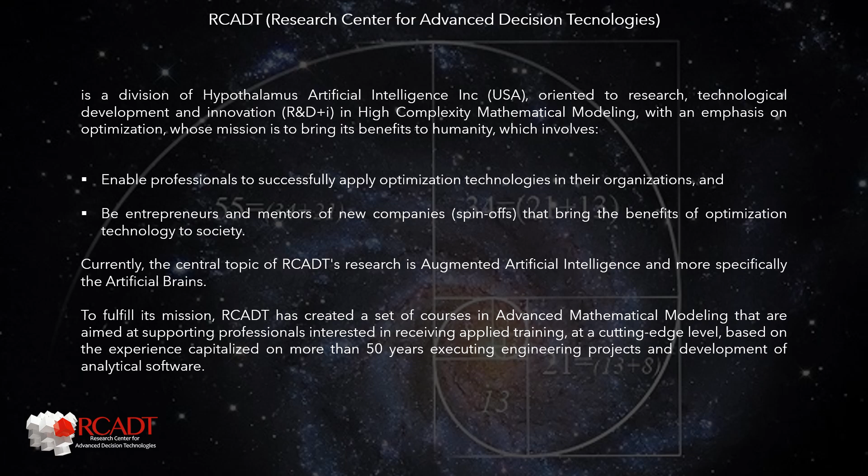To fulfill its mission, RCADT has created a set of courses in advanced mathematical modeling that are aimed at supporting professionals interested in receiving applied training at a cutting-edge level, based on experience capitalized on more than 50 years executing engineering projects and developing analytical software.

Parallel thinking: like paper-based math, sequential math for single-processor computers is dead. As in the human brain, in the future only parallel mathematical thinking will be practical. The new analytics are autonomous, parallel, and distributed.

Objective and structure: the material covered in the course spans two broad areas of applied mathematical programming: oil and gas systems and markets modeling, and implementation of owned enterprise-wide optimization systems.

Both topics are addressed from HAI's vision of multi-problem mathematical models, in which the development of computer solutions is oriented from the programming of algebraic formulas to the structuring of models, integrating the problems that make it up, as a Lego game. The student will learn about the main technologies for the implementation of mathematical programming algorithms and will learn to see them from this point of view, typical of Industry 4.0.

But it is not a specialized course in algorithm implementation.

Structure: the course is based on specialized academic activities aimed at training the participant in the main mathematical problems that must be solved in the strategic and tactical planning, operations scheduling, and process control of oil and gas systems and markets. The basic unit of the course is the virtual session, with an average duration of 90 minutes each.

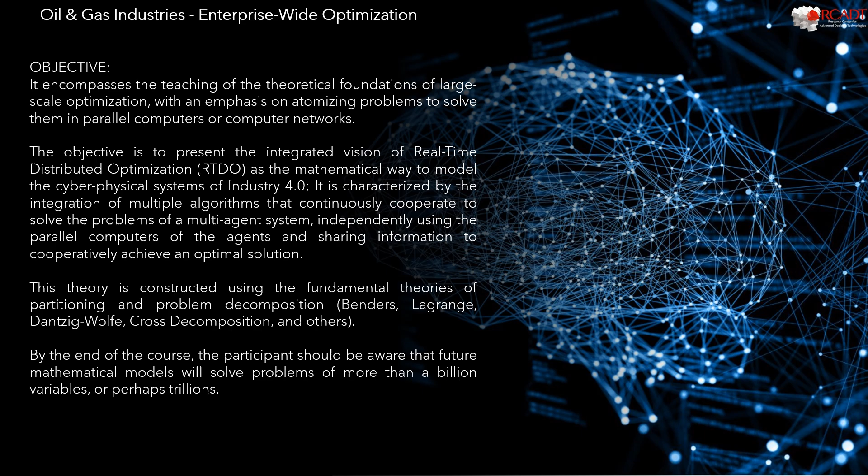By the end of the course, the participant should be aware that future mathematical models will solve problems of more than a billion variables, or perhaps trillions.

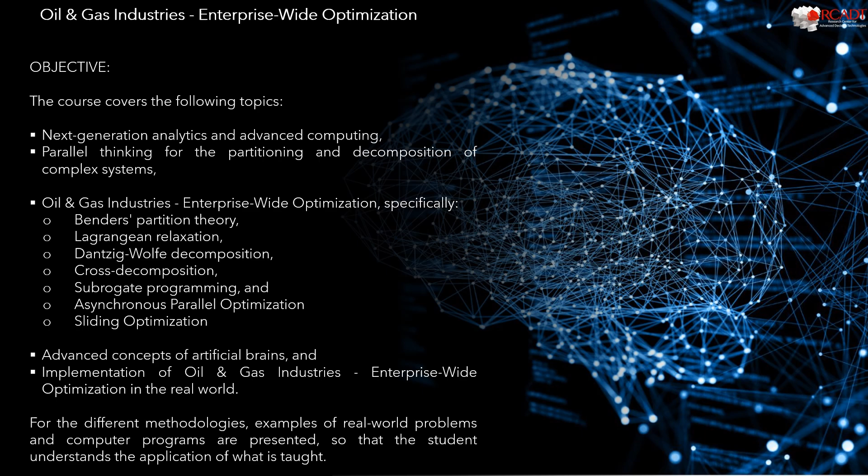The course covers the following topics: next-generation analytics and advanced computing, parallel thinking for the partitioning and decomposition of complex systems, oil and gas industries, enterprise-wide optimization, specifically Benders partition theory, Lagrangian relaxation, Dantzig-Wolfe decomposition, cross-decomposition, subrogate programming, and asynchronous parallel optimization, sliding optimization. Advanced concepts of artificial brains, and implementation of oil and gas industries enterprise-wide optimization in the real world. For the different methodologies, examples of real-world problems and computer programs are presented, so that the student understands the application of what is taught.

Aimed at professionals, engineers, data scientists, mathematicians, physicists, consultants, economists, software developers, etc., who require and/or wish to become experts in mathematical modeling, acquiring the knowledge to handle the state-of-the-art parallel and distributed analytical level, using mathematical programming intensively. This continuous training program strengthens the analytical skills and professional criteria of the participants, so that they can exercise, share and/or supervise, with propriety, the professional functions of this branch of knowledge, in accordance with the state-of-the-art of the methodologies and technologies that support the digital transformation of companies.

The course is aimed entirely at the oil and gas sector, therefore, all the material will deal with this industry and other energy-related businesses. Obviously, those who get the most out of the course are mathematical modelers experts in the oil and gas industry. But executives, managers and engineers in the industry are trained to understand the present and future of artificial intelligence for decision-making, to structure and participate in projects of this science of the future. Artificial intelligence is accessible to everyone, but understanding its true scope requires proper training. AI can teach knowledge, but it cannot create understanding. This is the responsibility of the student.

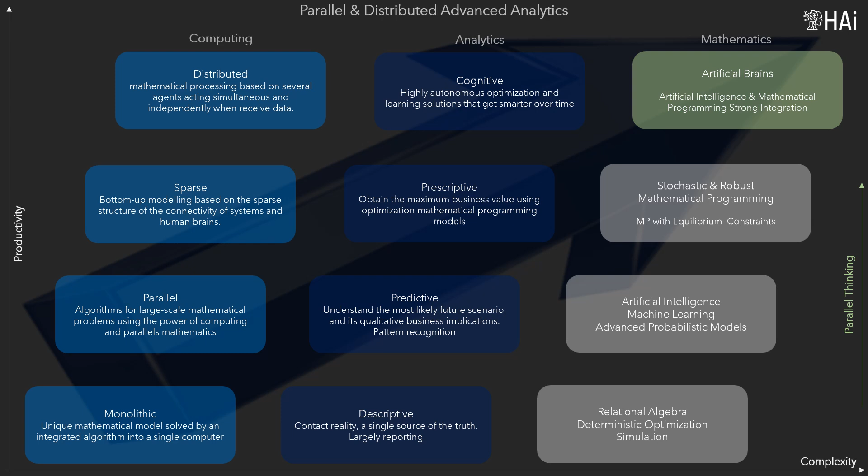Artificial entrepreneurial brains rely on the development of parallel thinking when a complex system must be analyzed, and reality is complex. The diagram presents the simultaneous evolution of three fundamental aspects in Industry 4.0: information technologies, analytics, and mathematics. The instructor of the course is Engineer Jesus Maria Velasquez Bermudez, Ph.D., who is the creator of the artificial hypothalamus, the result of the integration of mathematical programming with artificial intelligence based on neuroscience. Most of the things and processes that humans use have been totally affected by technology, which has opened up the human imagination producing previously unsuspected results. Mathematical modeling should not escape this process, starting from discovering the mathematical foundations that serve to establish the laws that govern physical, industrial, economic, biological, health, and social phenomena, and with them build mathematical models and increasingly powerful calculation algorithms.

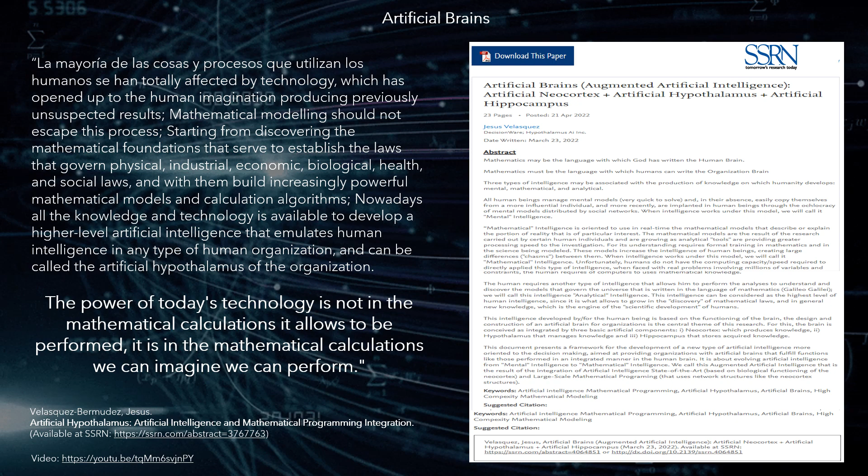Nowadays all knowledge and technology are available to develop a higher-level artificial intelligence, which emulates human intelligence in any type of human organization, and can be called the artificial hypothalamus of the organization. The power of today's technology is not in the mathematical calculations it allows to be performed, it is in the mathematical calculations we can imagine we can perform. The founder and chief scientist of HAI is the creator of OpTex, his most important technological work. The video: the history of OpTex, the optimization expert system. From the simplex method to multi-problem models, OpTex expertise meets artificial brains, moving toward mathematics-based general artificial intelligence.

And the article OpTex, where optimization expertise meets artificial brains. They present the history of OpTex, which is the professional history of Jesus Velasquez Bermudez. Jesus Velasquez Bermudez in 1990 created OpTex, Optimization Expert System, an optimization platform that was developed with a new vision of mathematical programming. To date, OpTex has completed 34 years of continuous growth and updating.

Proof of this is the current R+D plan that HAI is developing to incorporate the latest achievements of AI, such as ChatGPT, to facilitate the dissemination of mathematical modeling in Industry 4.0, taking it to the level of people not specialized in the subject. You can find more information about OpTex in the LinkedIn post.

From simplex method to mathematics-based artificial general intelligence. The founder of HAI has focused his scientific research on the development and incorporation of parallel optimization algorithms to OpTex. The algorithms created are: Primal Dual Subrogate Algorithm, PDS; Multi-Level Benders Partition, MBP; Generalized Stochastic Dual Dynamic Programming, GSDDP; Multi-Benders Decomposition, MBD; and Sliding Optimization. These algorithms, and others existing in the literature, support the implementation of artificial brains.

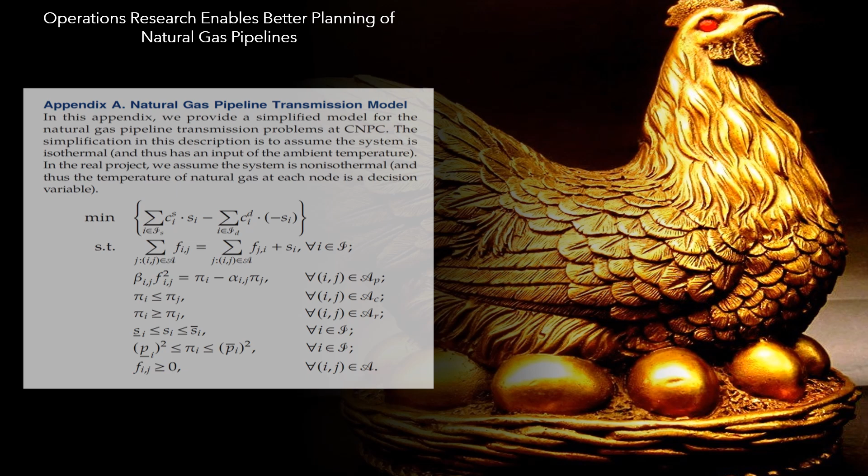The image presents the algebraic formulation of the natural gas pipeline transmission model. Without fear of being wrong, it can be said that mathematical optimization models are the goose that lays the golden eggs of China National Petroleum Corporation.

Oil and gas industries. Enterprise-wide optimization and advanced analytics solutions. The interested party can watch the webinar, in Spanish, live: Supply oil chain optimization, advanced analytics solutions, to have an overview of mathematical modeling in the oil sector. The oil industry includes global processes of exploration, extraction, refining, transportation and marketing of petroleum products. The largest volume products in the industry are fuels, natural gas, fuel oil, and gasoline. However, petroleum is the raw material for many chemicals, including pharmaceuticals, solvents, fertilizers, pesticides and plastics.

The table, elaborated by IBM, shows a summary of the optimization solutions for oil and gas enterprises. At the origin of mathematical models in computers, starting in 1947, decision support systems, which represent the optimization system of an owned company, have been visualized as composed of multiple mathematical problems, one for each line of the table, which are operated individually and communicated sequentially by humans. This way of operating produces solutions close to the optimal, but not optimal, because they generally have no feedback.

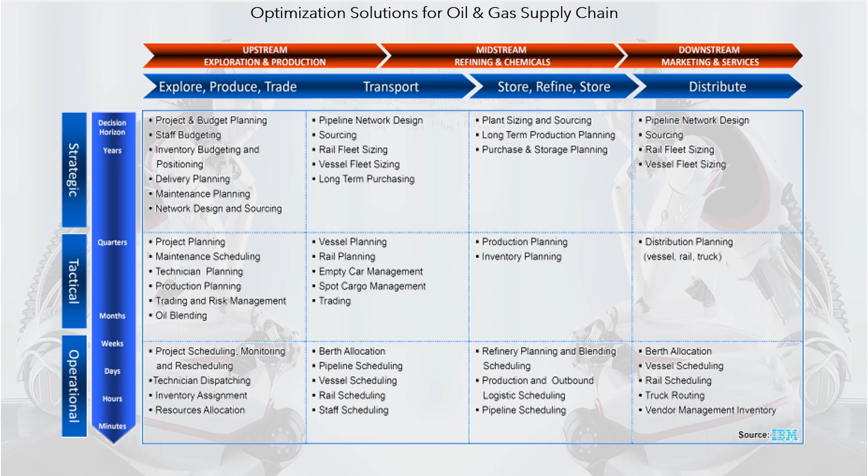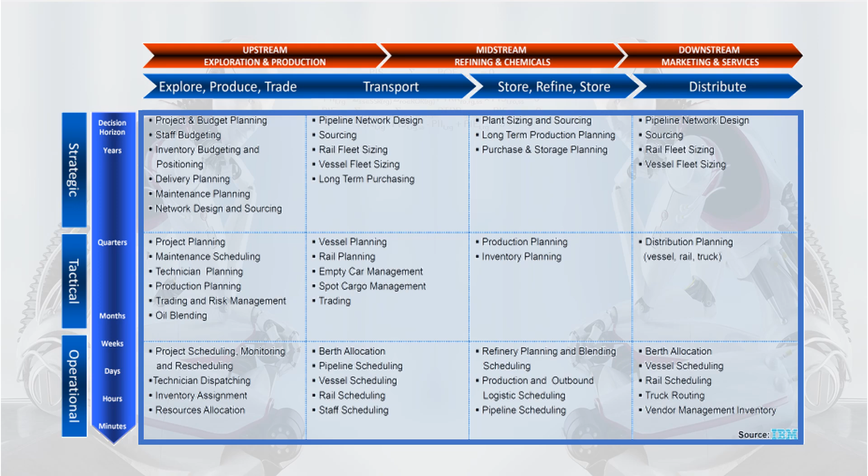The current technological revolution completely changes this approach. Today, O&G business optimization can be visualized as a single supermodel, composed of submodels, which in turn are made up of mathematical problems, one for each line of the table, which are solved by running in parallel, autonomously, communicating with each other, and managed by a mathematical artificial intelligence, produced by a generative artificial intelligence.

Hierarchical coordination of planning tools. It is traditional to organize decisions hierarchically into strategic, tactical and operational. The operational decisions are divided into the scheduling and advanced optimal control. However, due to the technological progress generated by Industry 4.0, mainly in relation to smart metering systems, nowadays we can talk about a new type of online optimization modeling, real-time distributed optimization.

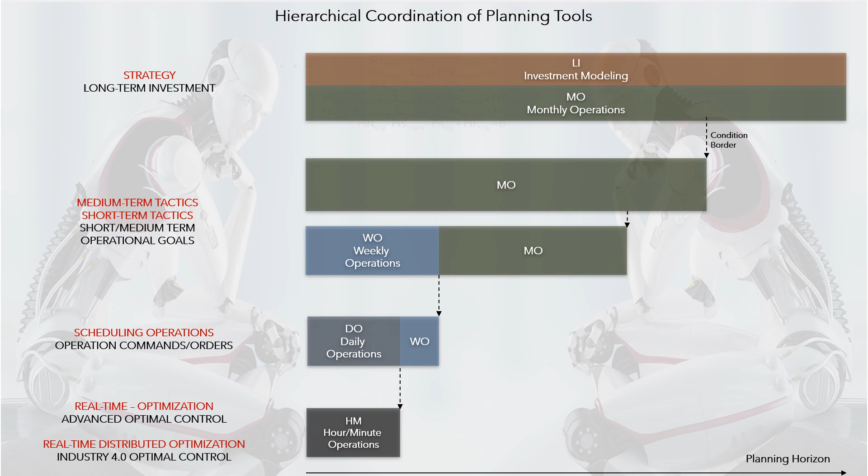From the point of view of mathematical modeling, hierarchical levels are intertwined and coordinated through the boundary conditions in time, and common modeling that can be shared. The modeling strategy of HI is that all models of a decision support system can communicate with each other.

Large-scale optimization and artificial brains. One of the fundamental ideas of the artificial brain is the atomization of the system, bottom-up approach, to integrate multiple mathematical models, using the framework of large-scale optimization methodologies, like multi-level Benders theory, and Lagrangian relaxation.

The same system can be organized hierarchically from multiple points of view. Because they are the same system, all these views must be equivalent. That is, in a non-degenerate optimization model, they have the same solution. The image presents the hierarchy from the point of view of regionalization.

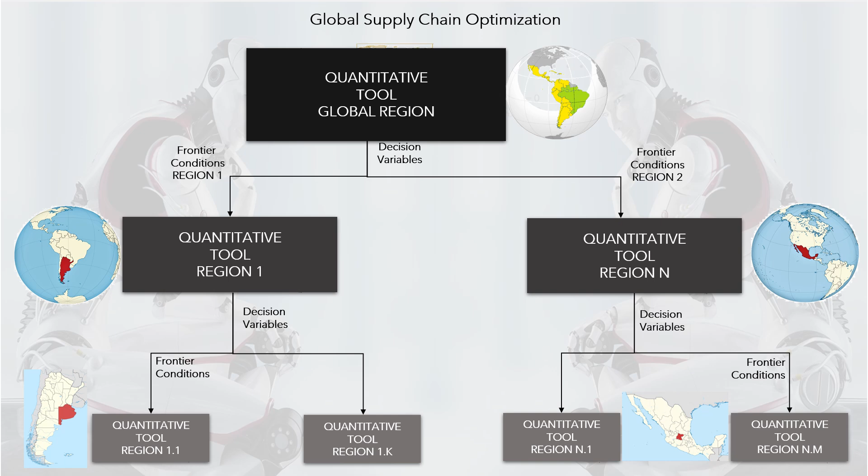Considering the vision of large-scale optimization, which can have multiple points of view, HI developed the multi-Benders decomposition, MBD, algorithm, to emulate the coordination of multiple points of view, just as the human brain does, following the studies carried out by Jeff Hawkins, summarized in his book, A Thousand Brains.

On the other hand, if other intelligent structures are studied, different from the human brain, it can be concluded that this structure is not necessarily the best, and that there are alternatives in nature that can be artificially implemented. An example is the octopus, which has 9 brains, 3 hearts, and 2 memory systems, which it uses to control each of its 8 limbs independently, allowing it to move nimbly and react quickly to any threat.

In addition, it has a central brain that hierarchically coordinates the secondary brains. This is one case, among several, of beings with multiple brains. It is evident that the structure of cephalopods is reproduced in human organizations, so a multi-brain artificial brain can be useful. In the global nature of modern companies, which must fulfill planning functions at different levels of their regional distribution for industrial, financial, and commercial operations, a multi-brain artificial brain structure is useful, as in cephalopods.

This hierarchical vision of the system can be converted into a different, but equivalent, approach. A vision focused on the mathematical neurons, which form a network connected according to the map established in an artificial cerebral cortex, forming what would be an artificial hypothalamus, which feeds its decisions from an artificial hippocampus, which stores the history of the system, in terms of math models, and executions of these models.

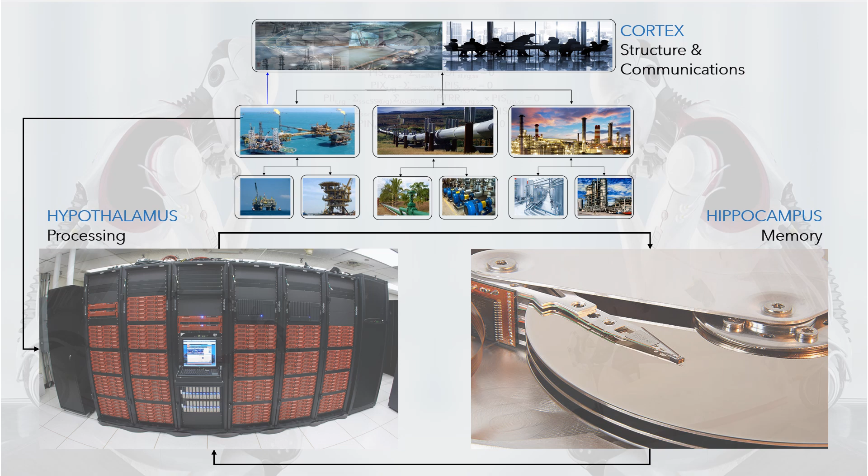Like the human brain, the artificial brain is made up of the following artificial components. Neocortex acts as an organizer of the connectivity of mathematical artificial neurons. Hypothalamus, it is the central processor that coordinates all the models included in an artificial brain, and hippocampus, it is the memory of the brain that stores the history of what is happening in terms of mathematical model runs. It is coordinated by a traditional artificial net.

The most important planning function in a company may be integrated business planning, IBP, which integrates, at least, three areas: finance, marketing and sales, and production. The IBP model can be looked at from 3 points of view. 3 independent models, which are integrated through a process in which the input of one model is the output of another. A monolithic model that integrates the 3 models, and that is run periodically, and an artificial hypothalamus that acts autonomously, in a distributed way, in real time.

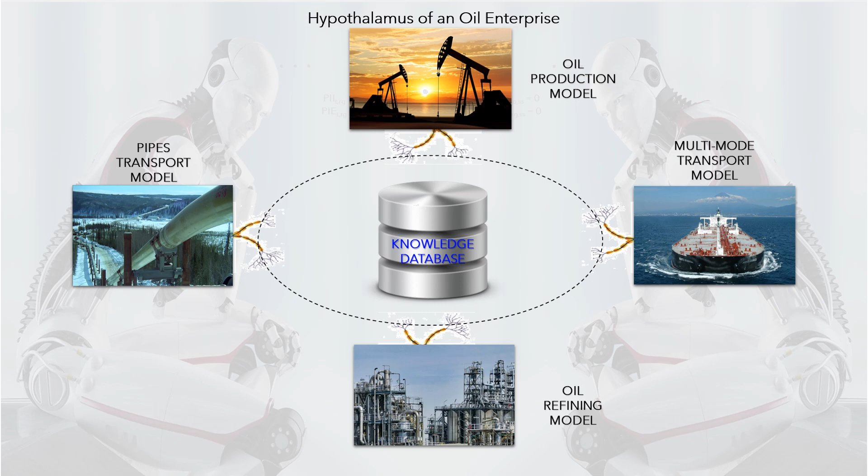Oil and gas enterprise-wide optimization system integrates mathematical models for each of oil and gas's supply chain links, so that supply chain planning is managed with a holistic view. At the level of industrial facilities, the oil and gas chain involves connection between industrial facilities, using multimodal transport systems.

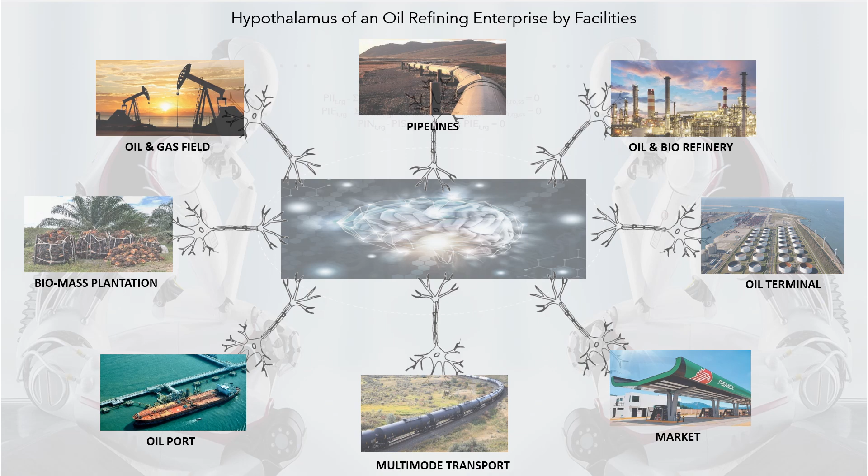Based on the models to be integrated, and considering the magnitude, and the association between them, it is considered that the hypothalamus of a refinery business should be made up of 5 subsystems. Oil refining and petrochemical, refinery industrial services, water treatment, multimodal transport, and financial and fiscal.

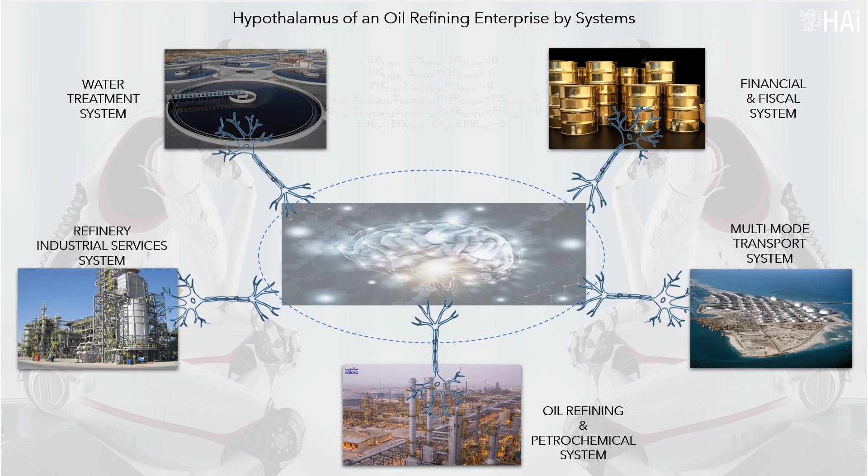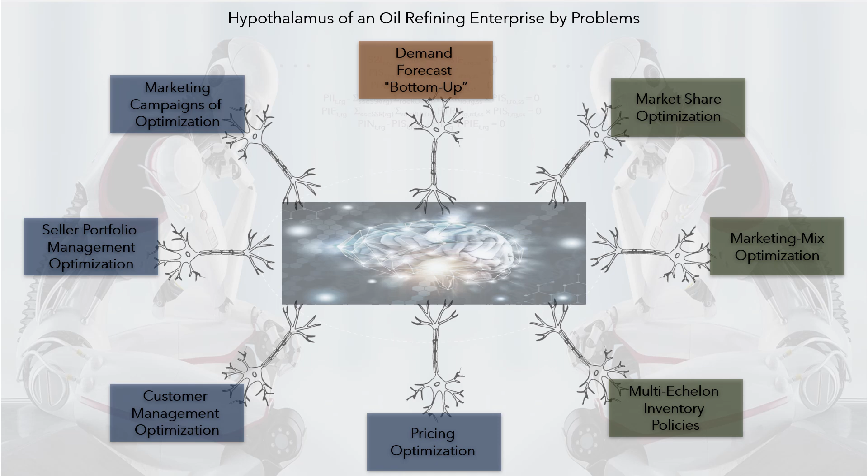Now, if you look at each business from the point of view of functionalities, you have an artificial brain made up of multiple models, associated with the problems of the administrative functions of each industrial plant. It generates another brain of the same problem. Artificial brains can share models such as production, where the sales and operation planning model belongs to the brain of systems and the brain of functions. In the same way, the models can share math problems, and the problems can share equations.

Construction of artificial brains. The methodology for building an artificial brain follows a formal modular process, which HAI calls structured mathematical modeling. First, all mathematical equations, and their components, are stored in a relational database, part of an artificial hippocampus, which can be handled using SQL, standard query language. This implies an open and standardized structure, which is not common in mathematical modeling.

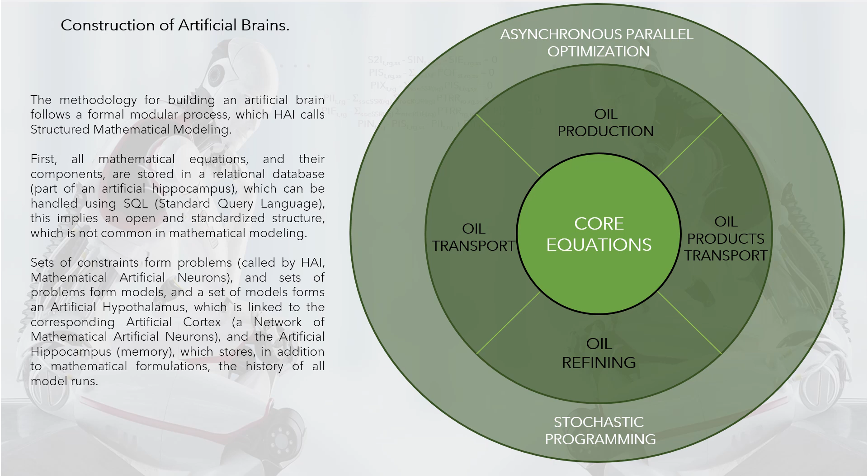Sets of constraints form problems, called by HAI mathematical artificial neurons, and sets of problems form models, and a set of models forms an artificial hypothalamus, which is linked to the corresponding artificial cortex, a network of mathematical artificial neurons, and the artificial hippocampus, memory, which stores, in addition to mathematical formulations, the history of all model runs.

From the concept of integrated business planning, it evolved towards enterprise-wide optimization, which implies expanding the coverage of the decision support system, which HAI calls enterprise-wide optimization systems. Visually, it is easy to see the evolution of the IBP concept to EWO, which covers all operational functions of an industrial organization. This leads us to 2 problems that must be solved from a computational point of view.

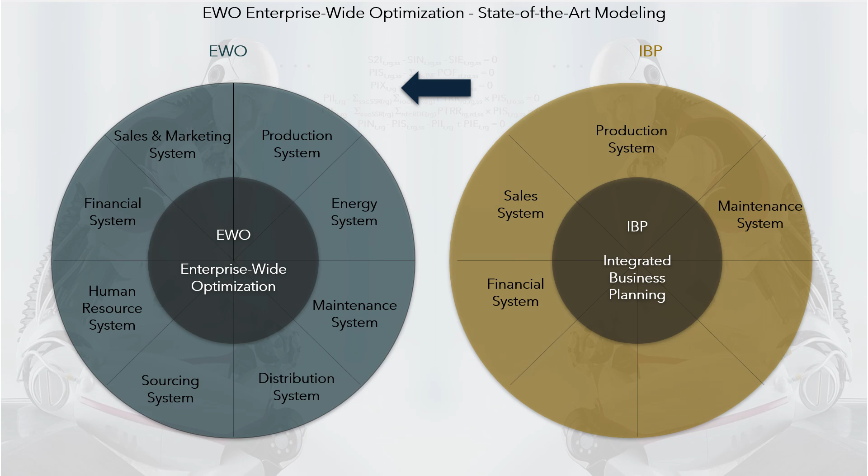If traditional approaches are used, many programmers are required to generate all the source code needed to develop and coordinate all models, and it takes a lot of computational power to solve the built-in problem. In order to solve this situation, HAI has developed OptX, Optimization Expert System, a generative artificial intelligence, which is responsible for producing all the source code required by an artificial brain, using large-scale optimization methodologies to solve complex high-dimensional problems.

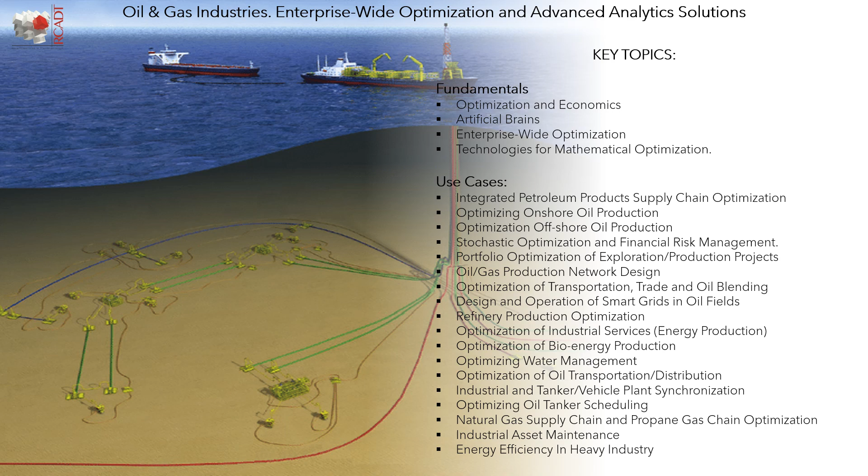Hypothalamus artificial intelligence brings real-world oil and gas business optimization practice to academia to teach enterprise-wide optimization systems implementation. The image presents the main topics that will be covered in the course. These are divided into fundamentals and use cases. Use cases are related to solving a real-world math problem solved by HAI or for other institutions. In several cases, the programs used to solve the problems are presented and analyzed. Below are different topics that the course covers.

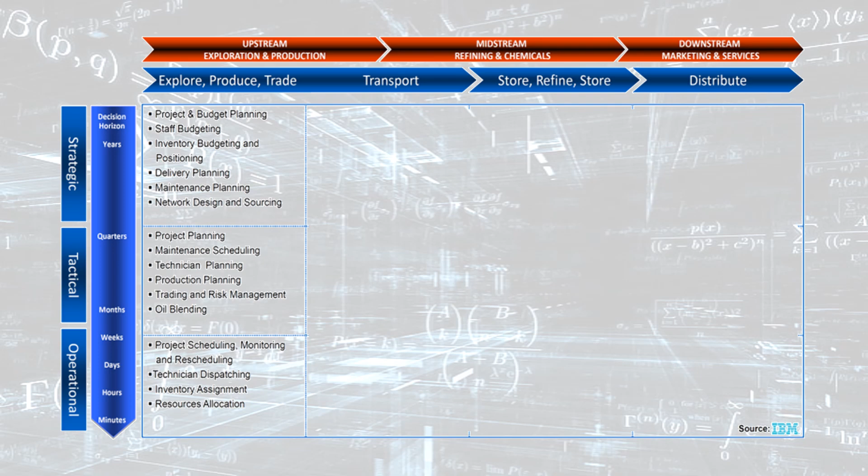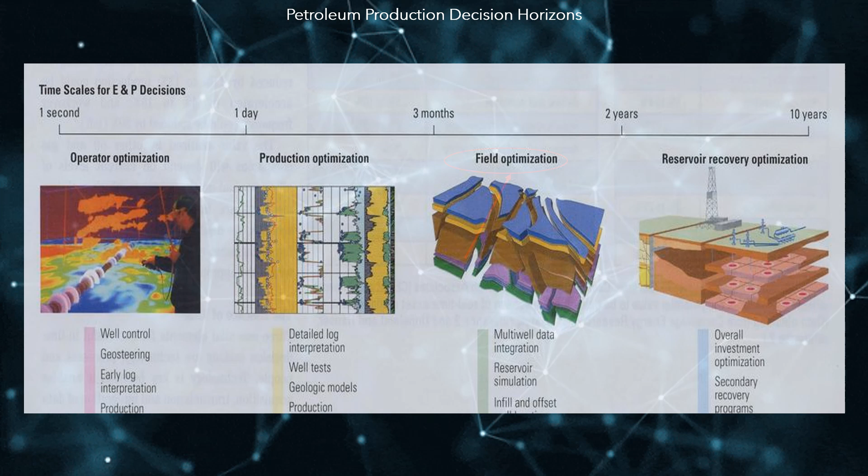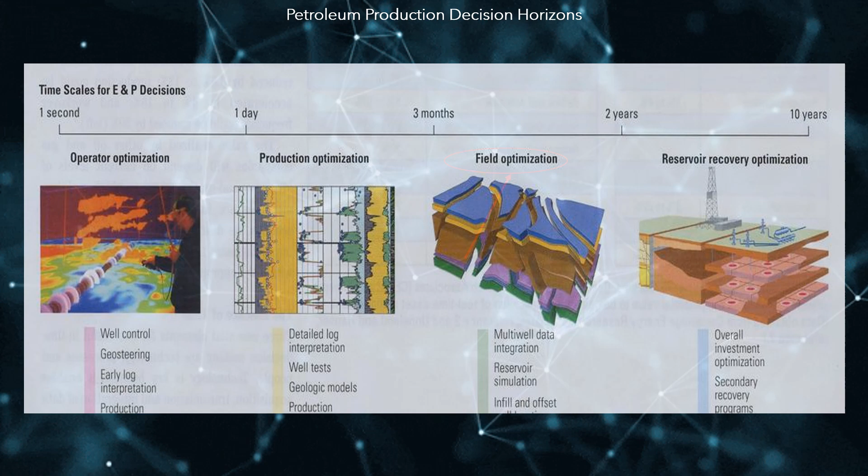The objectives of optimization models depend on the planning horizon, and can be divided into real-time, advanced control, scheduling, short-term production optimization, planning, medium-term field optimization, strategic operations planning, long-term planning, reservoir recovery optimization, and strategic investment planning, portfolio optimization in oil exploration and production.

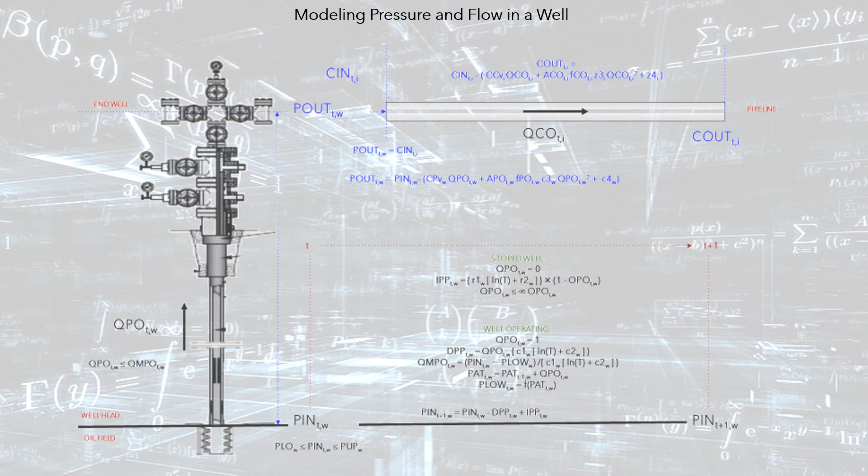The diagram summarizes the connectivity of the mathematical elements that allow modeling the well, in the aspects related to the pressure and flow of hydrocarbons, along the hydraulic system that is part of the production system. Operations planning integrates multiple fields, which in turn comprise multiple oil or gas reservoirs, which are operated by means of multiple interconnected wells. Interconnection, which occurs at the surface facilities, allows gas and oil to be sent to storage for subsequent release

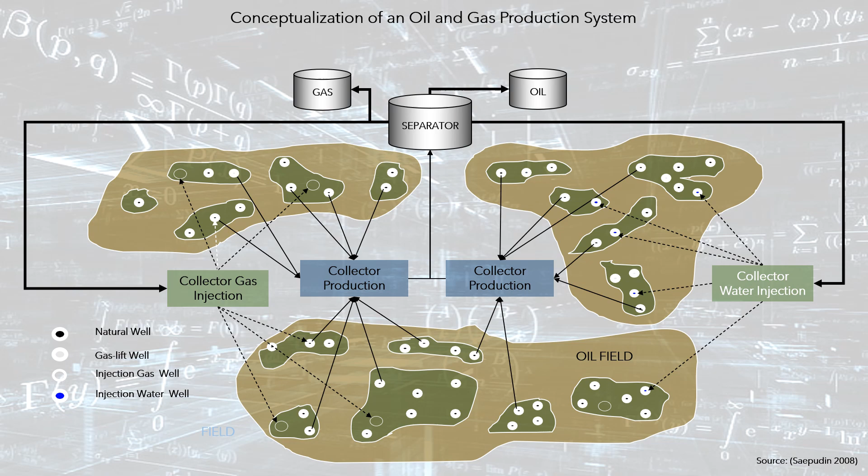through a transport system. The goal of optimization is to determine the contribution of each well, to meet demand while minimizing the total cost of the operation during the planning horizon, which is associated with energy consumption in the production system, plus investment in adaptation of deposits when restructuring of the productive system topology is allowed in the model. Smart grids, flue gas and hydrogen production in oil and gas fields are new activities that need to be optimized in the oil industry.

Oil transport, trading and blending optimization corresponds to a dynamic model that optimizes oil distribution between fields, refineries and ports, the oil mix for use in refineries, the mixture of oil for export in accordance with quality standards and established supply contracts, import of oil according to offers in the spot global oil market, and import/export of oil according to offers in the oil derivatives financial instruments.

Oil transport, trading and blending optimization corresponds to a dynamic model that optimizes oil distribution between fields, refineries and ports, the oil mix for use in refineries, the mixture of oil for export in accordance with quality standards and established supply contracts, import of oil according to offers in the spot global oil market, and import and export of oil according to offers in the oil derivatives financial instruments.

Pipelines planning and scheduling.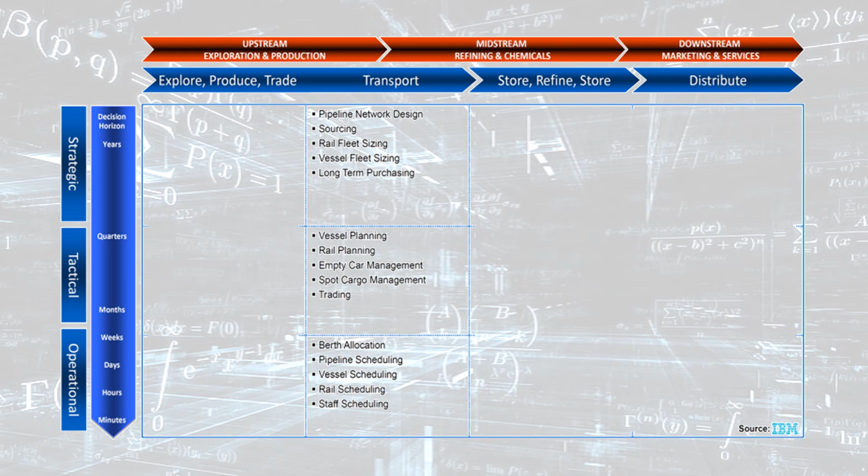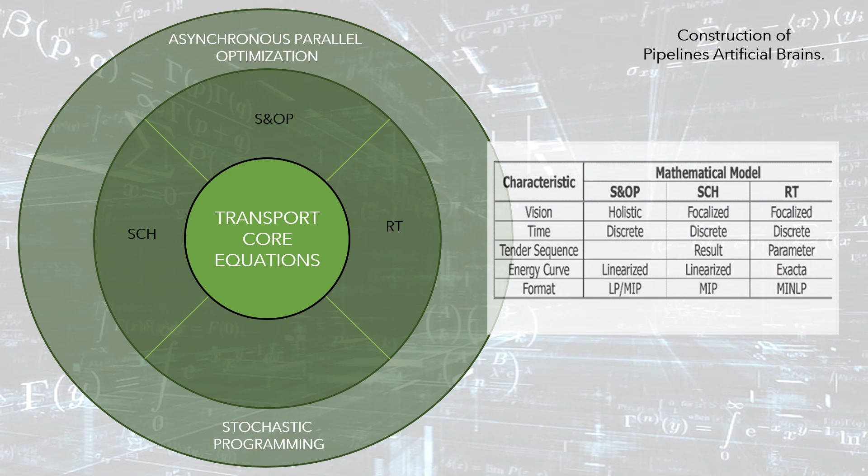The image presents the main models associated with the transport of oil and gas. Piping systems require at least 3 models to coordinate their operation: S&OP, tactical planning, on the order of months, weeks; SCH, daily operations scheduling, such as tenders planning; and RT, real-time, on the order of hours. Under the principle of transitivity of algebraic formulations, models grow in complexity as they descend the hierarchy of decisions.

All models share equations, mainly those related to the physical process. Therefore, they can be made in a continuous modeling process. The models of higher hierarchy will be more aggregated, in order to cover long periods of analysis, of the order of years. The emphasis of the model should include the interpretation of the economic and technological future, so it is appropriate that they are stochastic optimized.

As the models approach real time, the level of detail increases and the planning period decreases, the most important being the engineering representation of the process.

Those interested in knowing the topics to learn in this part, HAi invites them to watch the video: Oil pipelines companies, enterprise-wide optimization systems.

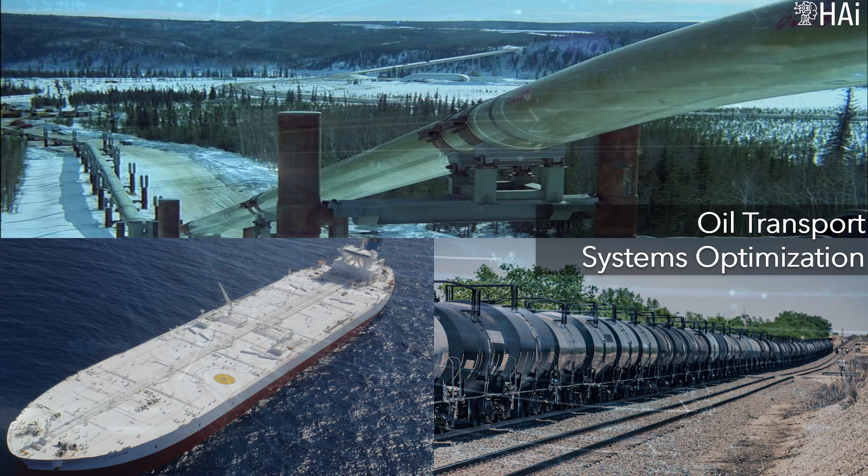Oil transport systems optimization corresponds to a general model, common to all types of oil products, raw, refined, natural gas and biomass, which represents the process for a specific system, including particular equations when this is required. It considers two types of transport modes: pipes and multimodal vehicles, like vessels, barges, train tanks, and/or truck tanks.

Kalman filter applications. Prognostic and health management, PHM, maintenance in pipelines. Those interested in learning more about these applications are invited to watch the video: Kalman filter applications in oil and gas pipeline systems.

Homeland security. Case: defending critical infrastructure in pipeline systems. Those interested in delving deeper into this topic are invited to watch the video: Homeland security defending oil and gas critical infrastructure. The video is based on the paper Defending Critical Infrastructure.

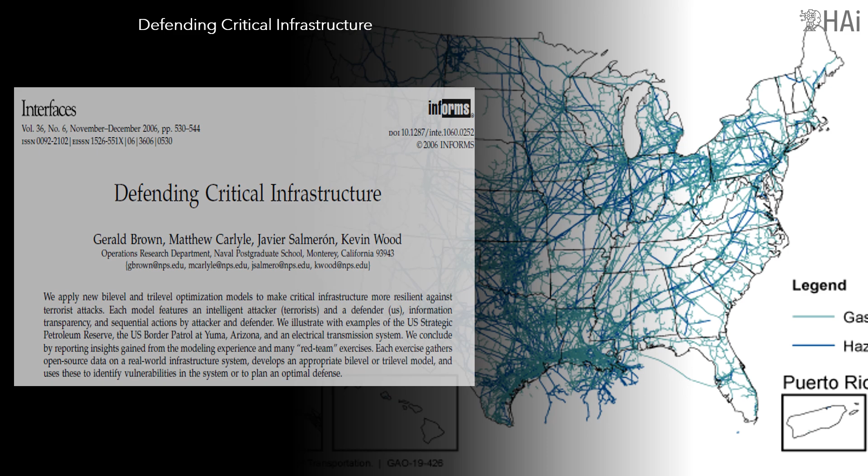Critical infrastructure protection. Development of tools to anticipate, identify, and measure the risks to which a nation or region's critical infrastructure is exposed. This is to reduce the risks and consequences of an attack. Bi-level and tri-level optimization models to make critical infrastructure more resilient against terrorist attacks are used. Each model features an intelligent attacker, terrorists, and a defender, us, information transparency, and sequential actions by attacker and defender.

3 real examples are presented: the U.S. Strategic Petroleum Reserve, the U.S. Border Patrol at Yuma, Arizona, and an electrical transmission system. Each exercise gathers open-source data on a real-world infrastructure system, develops an appropriate bi-level or tri-level model, and uses these to identify vulnerabilities in the system, or to plan an optimal defense.

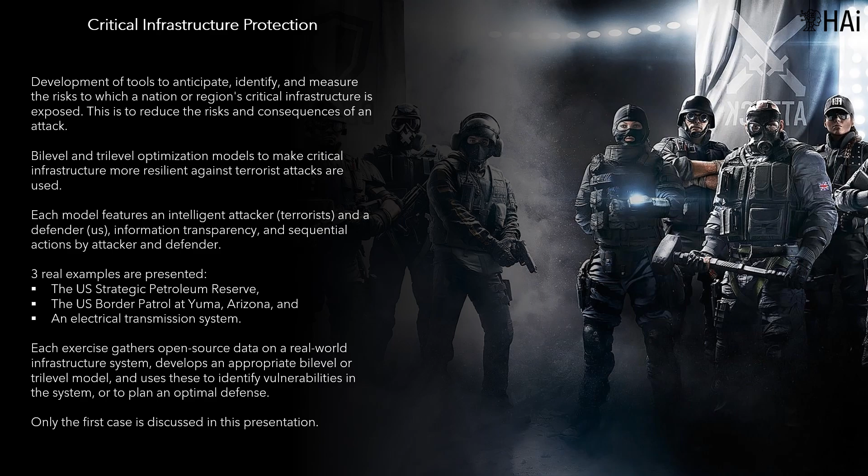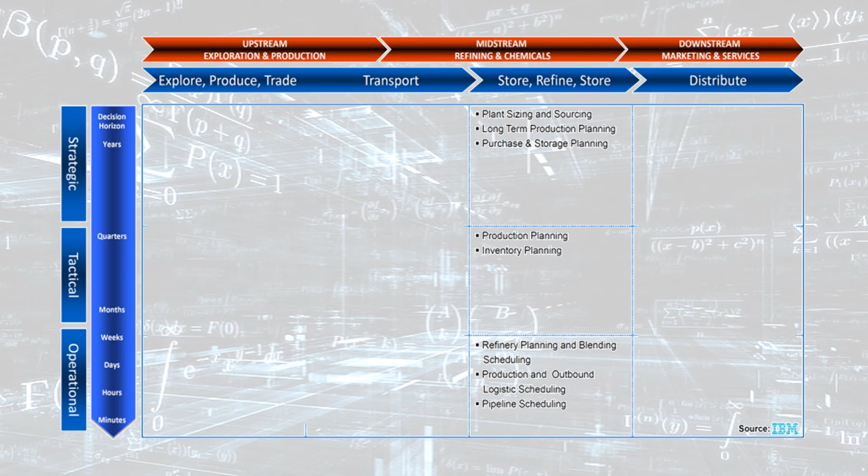Oil refining optimization includes a generic model that can serve interchangeably to plan the crude and/or biomass refining processes that may be spatially detailed in all units used in the production of refined products. The image shows the main models associated with the operations in the oil refining and petrochemical plants. Those interested in knowing the topics to learn in this part, HAi invites them to watch the video: Enterprise-wide optimization in process industries. Case: oil refining. Mathematical models.

The central process of tactical optimization of production and energy management is related to the integration of the two systems, through integrated mathematical modeling. These services often include self-generation, cogeneration and the exchange of energy with the interconnected electricity system. The objective of the model is to minimize the consumption, or cost, of the energy required by the industrial processes, supported by the industrial services plants.

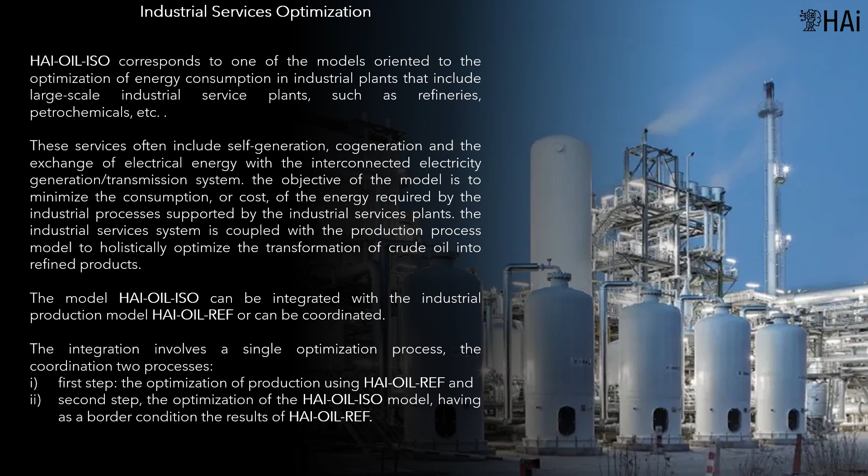The industrial services system is coupled with the production process model to holistically optimize the transformation of crude oil into refined products. The simultaneous optimization of both industrial production and energy conversion is related to polluting emissions of gases and liquids, associated with increasingly demanding environmental control laws.

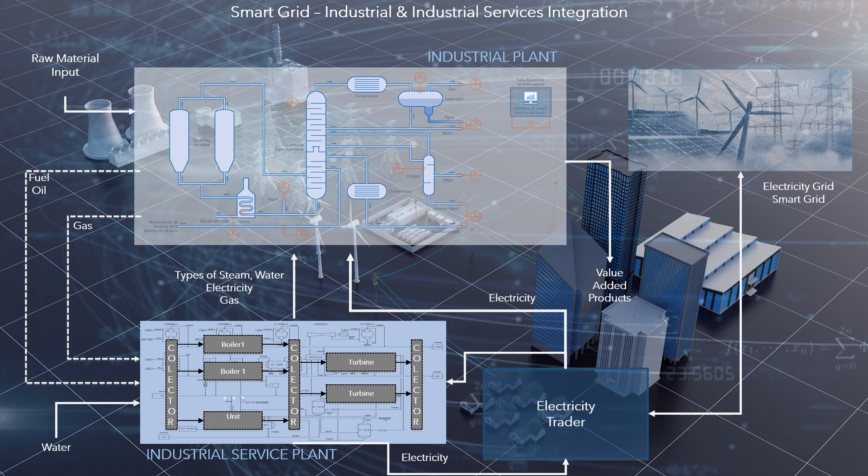HAI may integrate complex industrial process models to redesign the power supply system, according to the new power technologies. This type of model includes the simulation of polluting processes to determine the optimal mixture of fuels, in accordance with environmental regulations. Water consumption minimization in industrial complexes.

Maintenance of oil and gas assets. The mathematical models required to carry out this work can be classified into 2 types: models for optimization of maintenance activities, and models to support the general maintenance management.

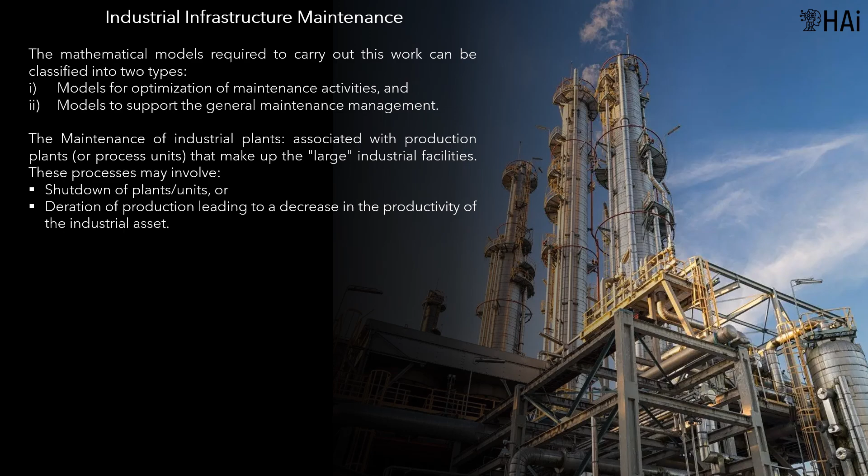The maintenance of industrial plants, associated with production plants, or process units, that make up the large industrial facilities. These processes may involve shutdown of plants/units, or deration of production leading to a decrease in the productivity of the industrial asset. Those interested in learning more about this topic can watch the video: PHM, Prognostics Health Management. Optimal maintenance of industrial asset networks.

Land distribution of oil products and coordination of inventories in regional storage systems. The image shows the main models associated with the distribution of oil products.

S&OP and ALM, integration of production, finance, and taxation models. Enterprise risk management.

ERM. The idea behind ERM is that an organization, while it can't eliminate risks, can manage them. ERM is a scientific approach to shaping risk, based on operations research methods such as applied probability and statistics, stochastic simulation, and investment portfolio optimization.

In the case of integration of production and finance, there are originally two models, S&OP and ALM. These models can be summed, resulting in a mathematical model containing the constraints of the two models, forming the S&OP-ALM model. The user will have three models: the original ones and the integrated model.

The integration process can be conceived as the S&OP model generating results, production and sales, which must be transformed into financial results in the ALM model, in such a way that the financial statements of the organization are produced, the control of which is the true objective of a private company.

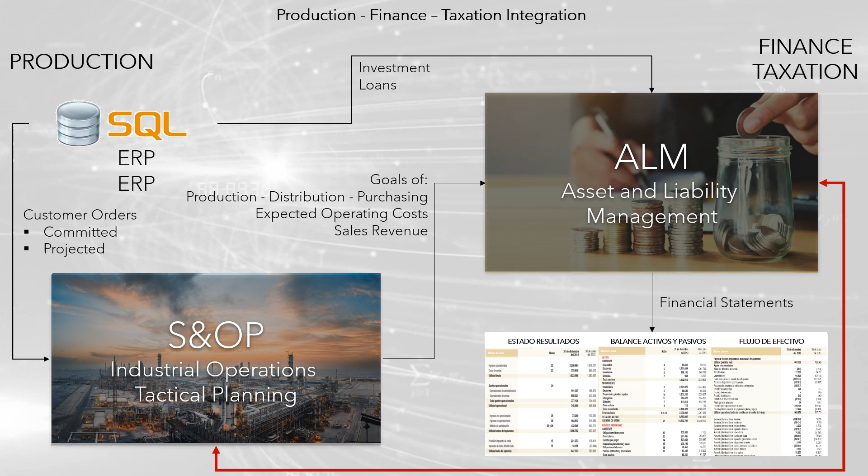General conditions. The price of the course is $1,000. Student discounts are offered as follows: 50% to undergraduate students, and 20% to master's students.

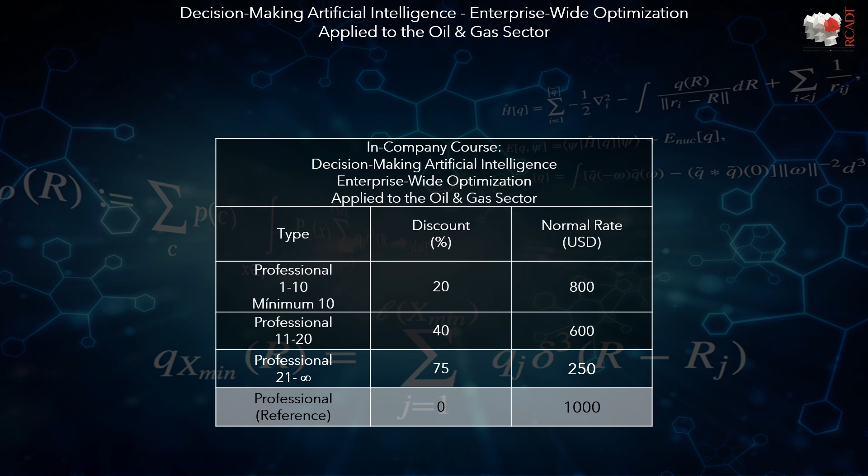The course may be taught under the in-company modality. In this case, prices vary depending on the number of students. Companies, public bodies, universities and research centers are considered. In the case of professional and trade associations, research centers and universities, HAI proposes bilateral agreements analyzing each specific case.

University courses. For academic institutions, this course is an opportunity to modernize their operations research courses according to the state of the art, updating professors at the level of doctoral knowledge, and implementing postgraduate courses in their institutions with the help of an in-house professor dedicated to this purpose.

Access the know-how of real-world application, and truly leverage digital, high-level, AI-powered education. Economic agreements have special conditions with the aim of promoting advanced knowledge in developing countries.

Projects. The value of the advice on a project will be between $500 to $1,500 per semester of the duration of the consultancy. The value will be defined once the student submits the project proposal.

Taxation. The above values do not include withholding tax and value-added tax. If necessary, these amounts must be charged to the value of the course in such a way that the net payment is equal to the stated rate. Payments via PayPal or similar have a surcharge of 10%.

Specific conditions. Academic inquiries are made directly to the scientific directorate, and special agreements and administrative consultations are carried out with the administrative directorate.